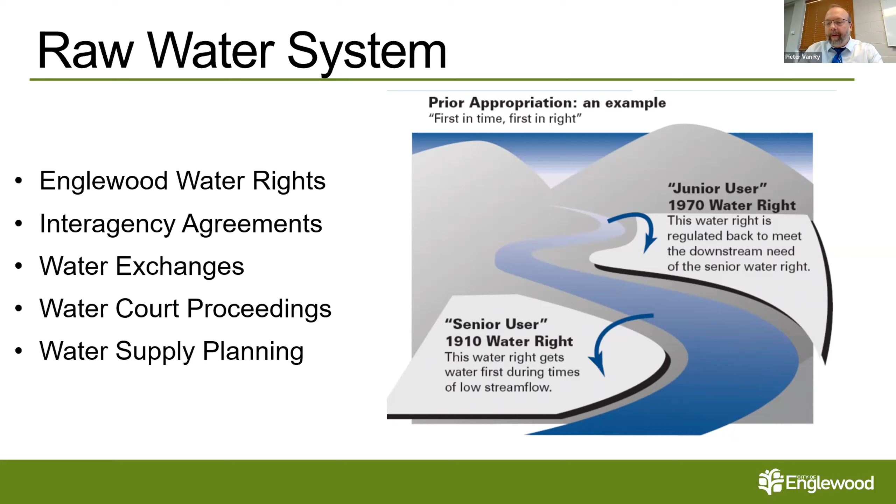The point of the two contracts is we get a lot of support from outside legal counsel and outside engineering support that's very specific to water rights. It's a very specific, unique skill set that it's unreasonable for us to have in-house. So the city for many, many years has worked with outside legal counsel and outside engineering. You can see some of the things they help us with, mainly water rights portfolio related things. They protect our water rights portfolio with the growth in Colorado. The pressure on water systems is growing every year, and with that pressure is further exposure and vulnerability to our water rights if we're not paying attention.

A lot of what they do is track every water court case that's going on and make sure that Englewood is not injured by those cases. They also optimize the portfolio, and we do a lot of work around supply and demand planning. So this is the raw water supply work.

The two companies we work with are Berg Hill Greenleaf and Martin and Wood. We've worked with them for many years. They have a significant amount of institutional experience and knowledge of the city's water rights portfolio.

They have history that goes back to the 90s as it relates to how our water rights have been managed and supported over the last several years, which is important as new cases are brought to water court. That historical knowledge of why agreements or stipulations were made in particular court cases is important, so they retain all that information and continue to support us as new challenges or water rights are sought by other parties.

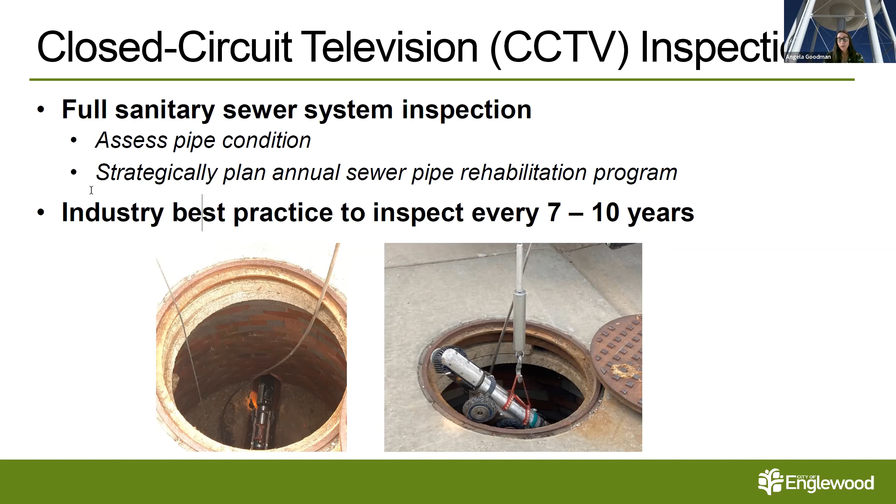There are some pictures of a typical camera getting lowered into a manhole, and then the camera actually inside the manhole, and it drives along the bottom of the sanitary sewer. The sewer does not have to be completely devoid of water in order to get a view of what's going on. 5 contractors responded to our RFP, request for proposal.

We actually selected ProPipe Inc. They had the best approach to complete the work, and they had the lowest bid. The table below shows all 5 contractors that submitted what their fee was, and includes a $50,000 traffic control cost for each of them.

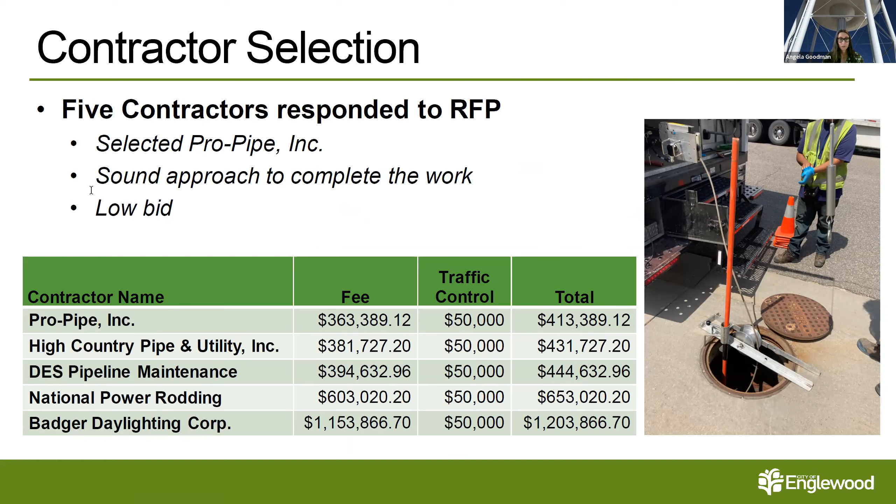Are there any questions? It doesn't appear so. Oh, here we have Jim. Go ahead. I do have one. Do you know, as far as number of blocks or miles or whatever, how much they're going to cover each year? That is a great question.

Let me pull up the other piece of information that I have. So we are doing approximately 80 miles of sanitary sewer. That is the statistic that I have. I don't have how many blocks that is. It's essentially the entire system. That's the entire system, correct?

Well, I thought you did it every 7 to 10 years. So aren't you doing a 1/7 or a 10th of it? The total is 80 miles? The total is 80 miles, and the intent is to do the entire system in 1 year, and then you repeat that every 7 to 10 years so that you get an accurate picture of how the sanitary sewer system is changing over the years.

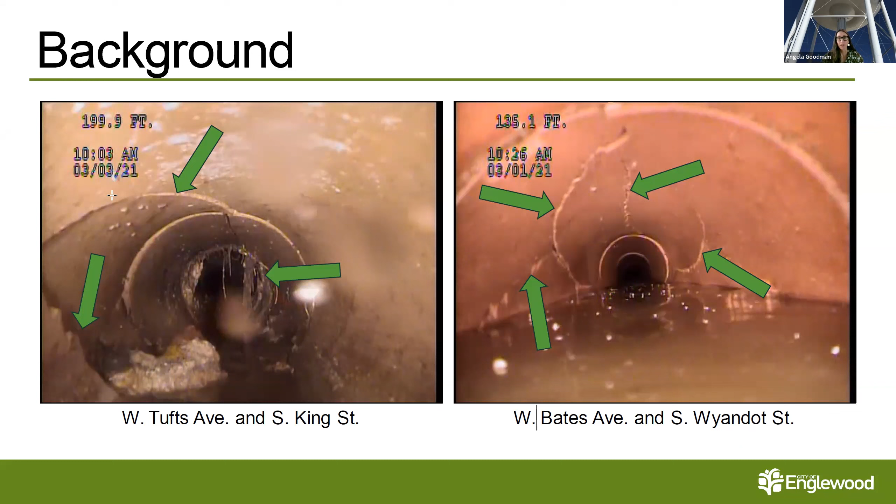So the cured in place pipe is actually a mostly trenchless technology. The liner is actually inserted into a manhole, and then it kind of turns itself inside out through the length of a manhole to a manhole. It is a completely structural pipe, so that if the host pipe, as you can see in this slide, were to go away, you would still have a full pipe that is structurally sound.

After they do the CIPP liner insertion, there's another little tool that goes in and cuts out any service laterals that connect up to the sanitary sewer, and that is the extent of it.

All right, we have a few. I'm sorry, Mayor Sierra, is your hand still up, or do you have a fresh question? No fresh question, I'll lower it. Okay, Marjan and then Ty.

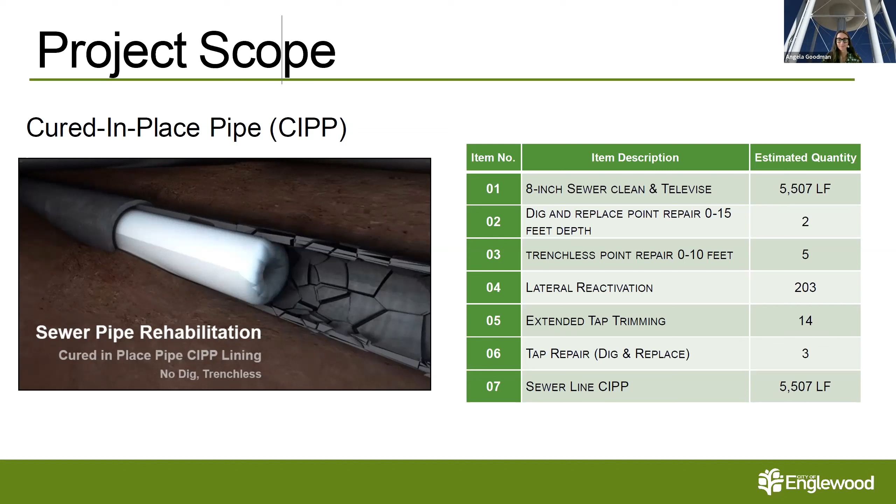Any further questions? All right, I think we're good. Marjan, do you have a new question or is your hand just left up? Yes, just a very fast question.

Have you guys worked with this company before? I have not worked with Granite Inliner. Insituform is kind of the old standard. When I was doing this 20 years ago, Insituform was kind of on the leading edge, and then I believe their patents ran out, so more people are able to do this. We did check into their qualifications, and in addition to low bid, they were a qualified contractor. Thank you so much.

Can I get a motion to recommend that City Council approve by motion a contract for construction with Granite Inliner LLC for sanitary sewer pipeline rehabilitation services in the amount of $415,555.55, with an additional $40,000 of staff managed contingency for a total project authorization of $455,555.55? So moved. Thank you.

Second. Is there a second? I don't know, did we have two seconds there? That makes a fourth, but no. I seconded. All right, thank you, Chuck.

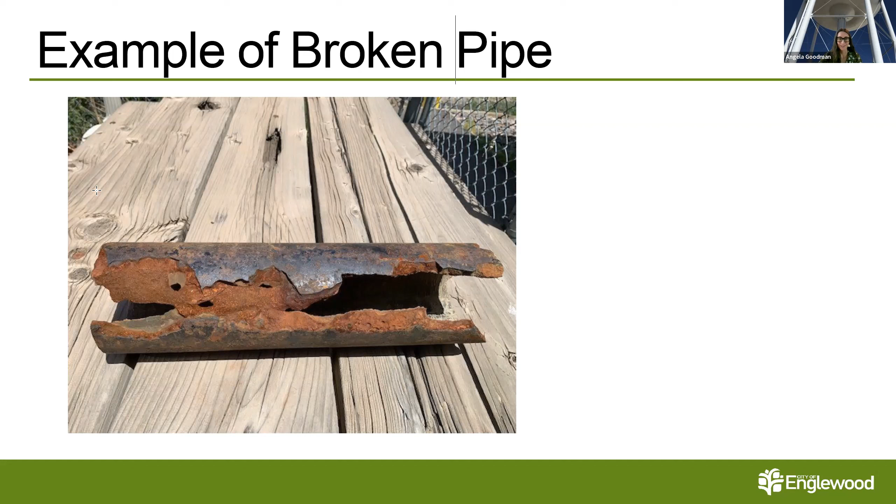As you can see from this example of a pipe that was broken, we actually took that out of a repair a couple months ago. Some of the pipe in our system is in bad shape, and when these breaks happen, sometimes the break itself is a little bit more catastrophic than others. This was actually a pretty substantial repair. I think the majority of the repairs are a little bit less dramatic than this — it's more of a pinhole leak — but I just wanted to share that with you.

And are there any questions? Not seeing any hands. I'll ask one, Angela: the inspection that we just discussed on the sewer side — do we do something similar on the water line side at some point?

We generally don't. I believe they're still working on the technology to line water lines. It's a bit different because it needs to be NSF approved since it's drinking water, so it's a different process. Wastewater is much simpler because there's a lot that happens between what goes into pipes to convey wastewater and what goes back into rivers or other systems to be treated. So most of the repairs we'd do on water lines wouldn't use the same method. We know our system is aging, and we mapped the water line breaks we've had historically, and there aren't pockets — they're kind of all over. You could almost pick any area in the city, cover your eyes and throw a dart at it, and it would make a big impact on the water system itself.

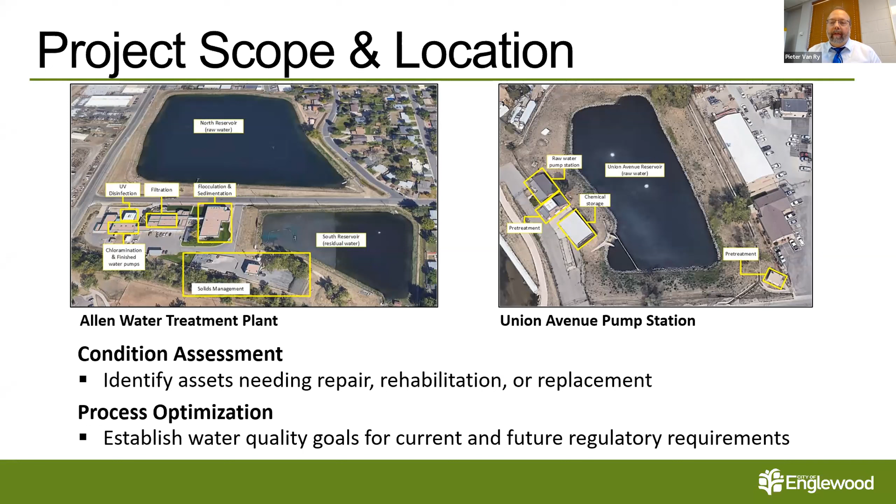So it's things needing rehabilitation and ways to improve the system performance to address that larger issue of taste, odor, and hardness, to see if there's ways that we can optimize in-plant as part of the treatment process to further improve those aspects of the water that we treat.

You can see the project deliverable is essentially a roadmap for future capital improvements specific to the Allen treatment plant. We have a number of projects already underway in parallel that we know are necessary for improvement. This will provide a more comprehensive inventory of the projects that are necessary.

The selection process: several consultants proposed on this project, and the selection committee evaluated the consultants and interviewed the top 4, ultimately landing on Brown and Caldwell, whose initial proposal was the lowest and also had the most relevant experience and the strongest approach to the project.

Here's the timeline of how that occurred. The RFP was posted, went to notice, and we're looking to do a notice to proceed sometime in the next month or so. Then, with the project duration, by the first quarter of 2023 we'll have a final 10-year CIP specific to the Allen treatment plant.

So with that, I will open it up to any questions.

I'm not seeing any questions at this point, so I will ask for a motion to recommend that City Council approve, by motion, a professional services agreement with Brown and Caldwell for condition assessment and process optimization services in the amount of $281,850, with an additional 10% staff managed contingency of $28,185, for a total project authorization of $310,035.

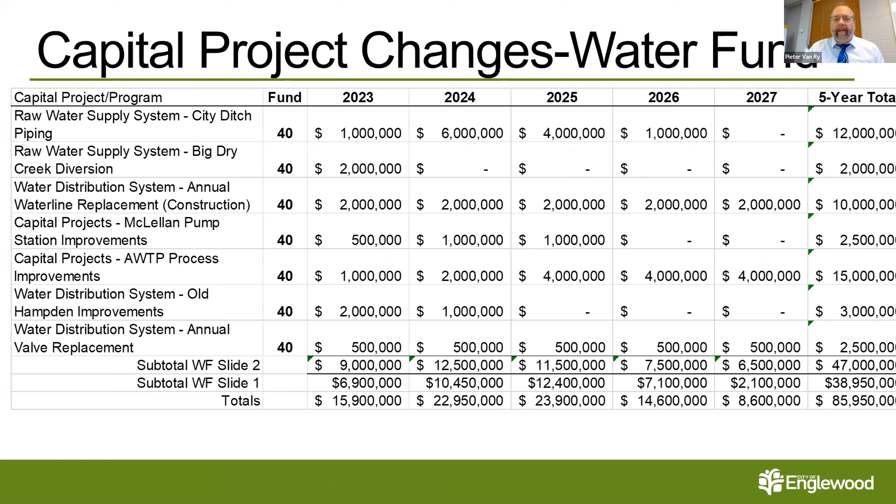The capital project we talked about a few months ago—nothing has really changed. The thing to keep in mind is that between 2023 and 2027, it's got a capital program execution of $86 million. A lot of that is WIFIA funded projects, and you can see the ramping up of those capital projects in the next few years.

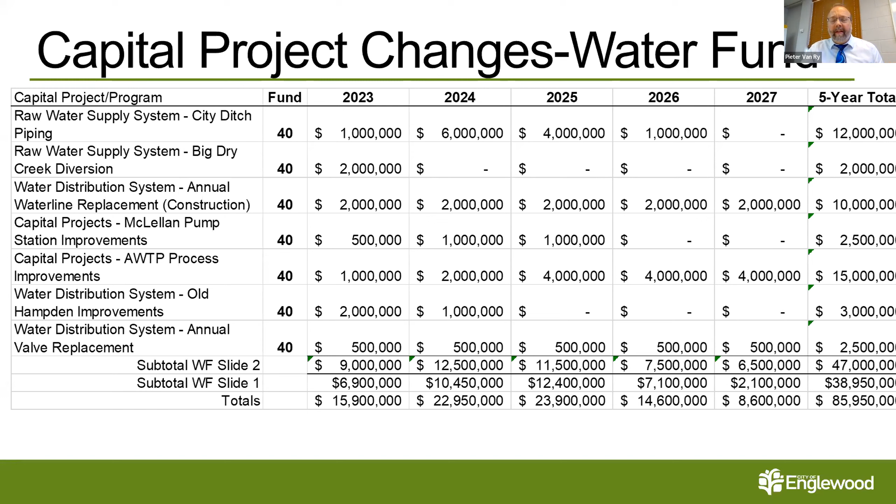I would anticipate that will slide out over the next few years because part of the challenge with executing capital projects is staffing and balancing that. What I don't want is to under-budget if we're in a position where we can actually execute a project. So it's aggressive, but just plan that it'll likely slide out over time. This is in our models, and it's sustainable based on our financial models.

We have a number of proposed FTEs to continue building out in-house resources for the water and sewer fund. There's a senior construction inspector geared largely towards executing that significant capital improvement program, and a couple of utility system techs for the distribution system. We've restructured that area to put complete crews together so we're not chasing issues, but strategically addressing things in a more programmatic approach. By adding these last two utility techs, we have 2 complete crews, plus support staff to help bring connectivity to engineering and other asset management aspects.

And ultimately 1 more plant operator. When we get fully staffed on plant operators with this last one, we have room to breathe—we're not scrambling and paying overtime to staff the plant with 2 people 24 hours a day if we lose a staff member or someone goes on vacation or medical leave. We've been building toward that, and 1 more FTE will allow us to get there.

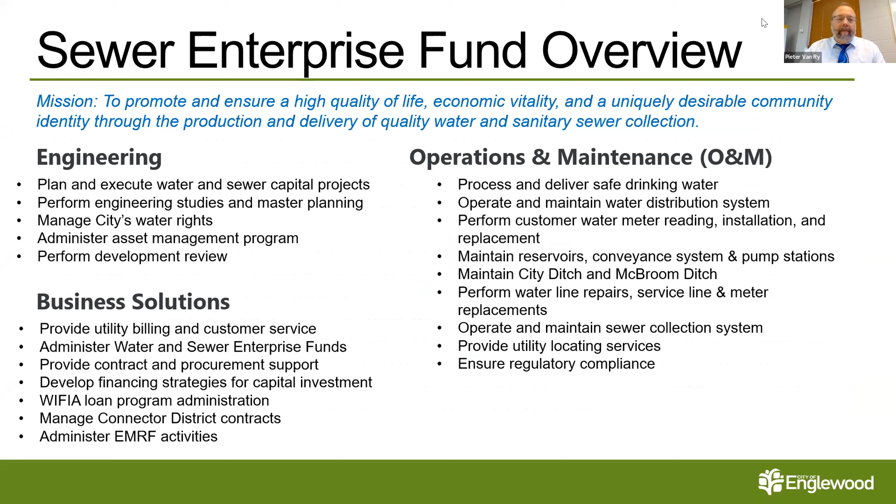So the sewer fund, a little bit quicker. You see it's the same overview, generally the same types of work. It's just instead of water related, it's sewer related. Same structure from utilities as a whole.

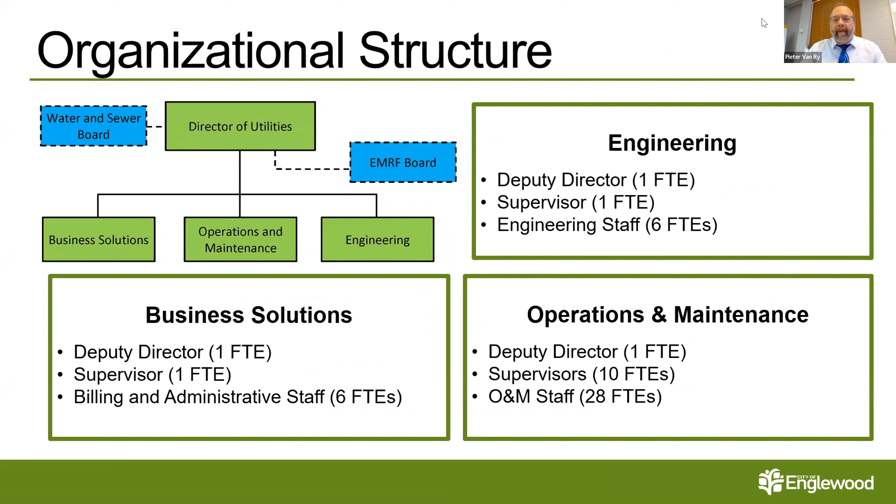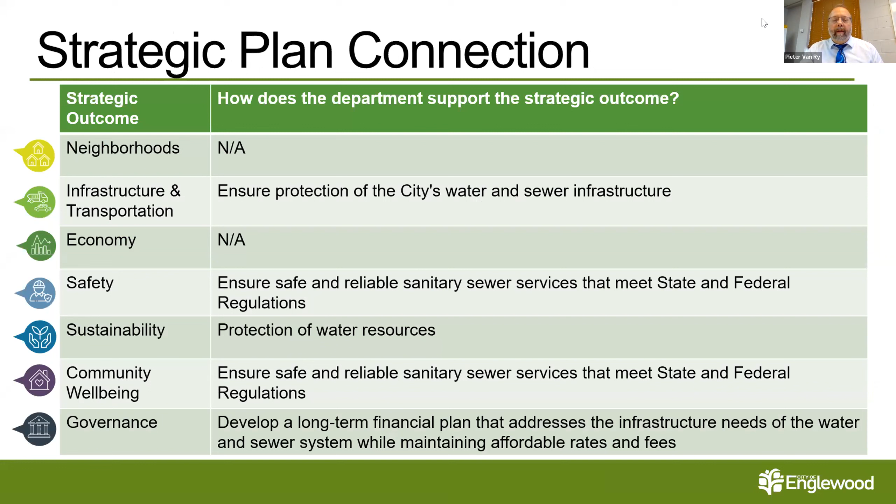A number of these staff are split between water and sewer so we charge them differently to the enterprise funds. You can see this is more about protection of water resources, protection of our clean water resources out in the environment.

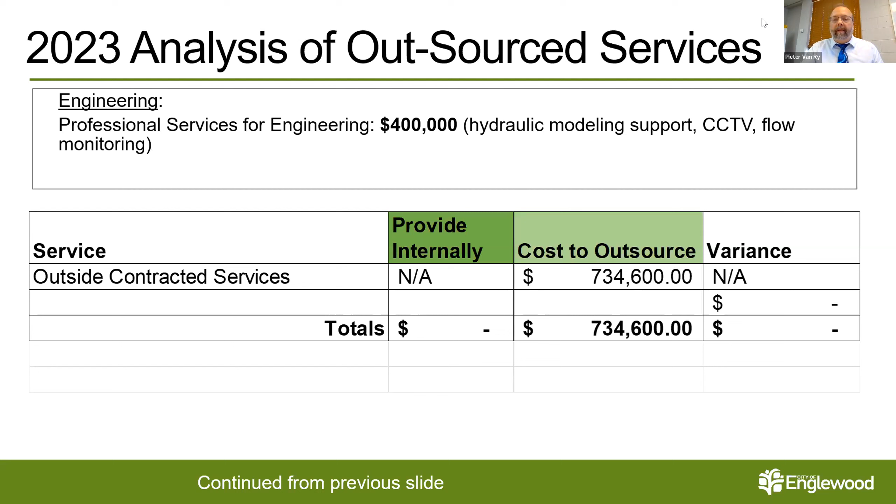You see the professional engineering, which is essentially the hydraulic modeling work, the CCTV that we talked about, and some flow monitoring, totals $734,000. That's the outside contracted amount.

The capital, with the exception of ongoing investment in sewer pipe and manholes, we have two major things. One is the Hampden Improvements Project, and then the major thing is the 50% contribution that the city of Englewood provides for SPR, and that's just under $7.3 million.

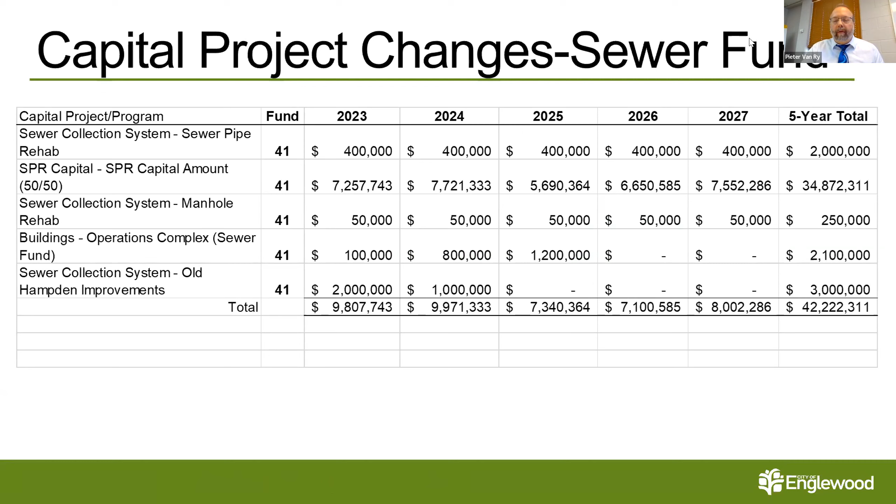There has been expressed interest from some of the districts, the most significant of which is Southgate. That district manager has expressed to us a desire to move away from annual billing, which is what we do today, to move to monthly billing. So that will move from those connector districts getting billed once a year to getting billed 12 times a year.

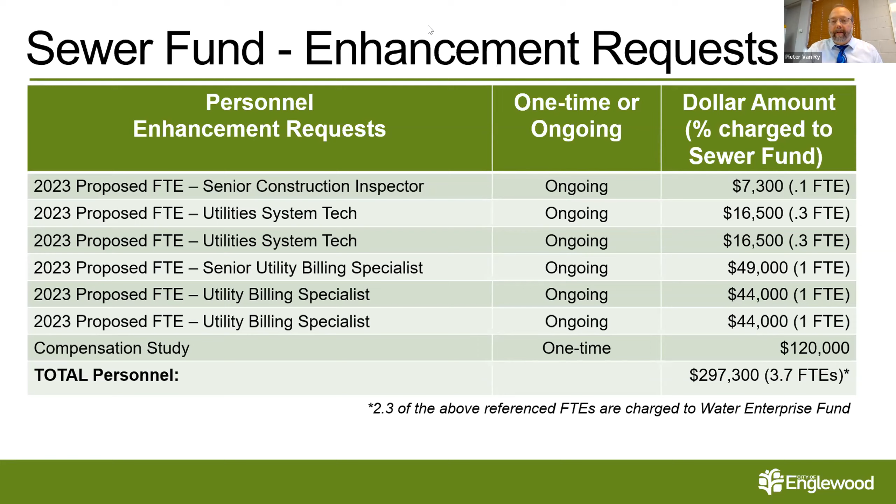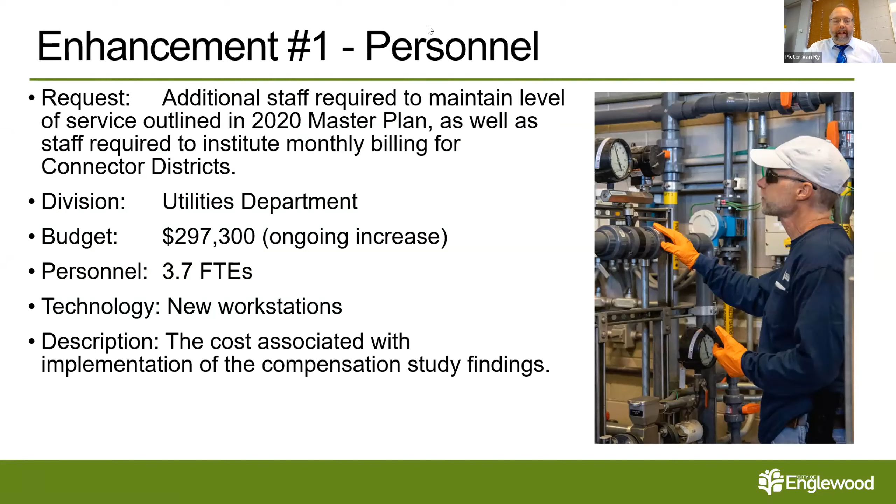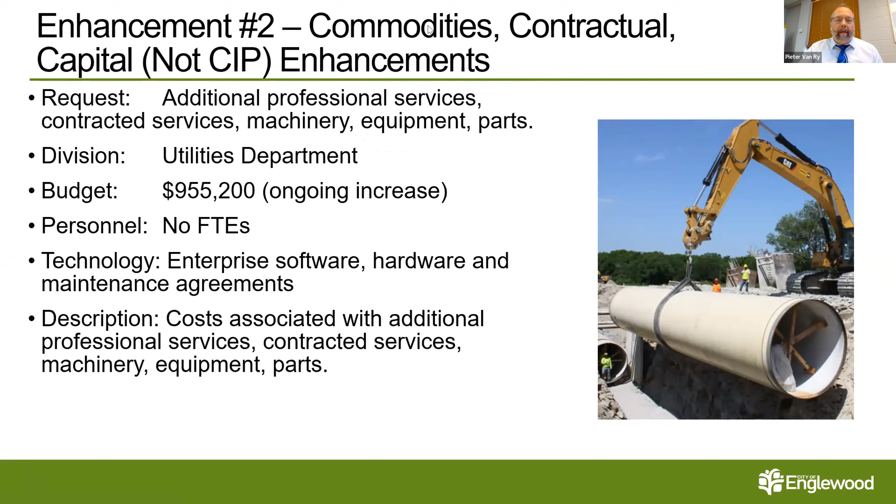There has been interest expressed by the connector districts. You can see the compensation study, that's the sewer proportion of the compensation study contribution. Personnel enhancements and contractual totals about $1 million. You can see what those are, the FTEs that we talked about, and then the non-CIP things that we're investing in to ensure that we ramp up the ongoing maintenance of the systems.

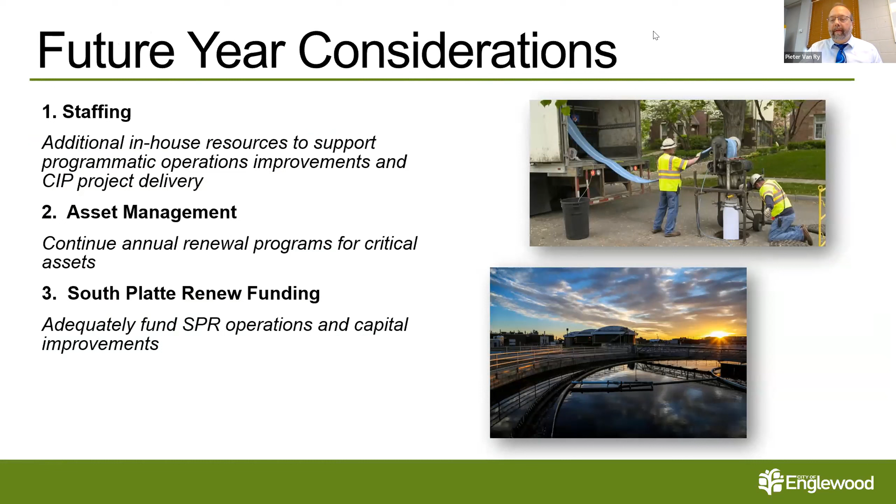Similar interdepartmental support, and then future considerations is staffing, asset management and renewal, and then the ongoing South Platte Renew funding, which is the most significant line item of the sewer fund as a whole. So that is the sewer fund.

I am going to turn this over to Director D'Andrea to talk about the stormwater fund.

Thanks, Peter. Good evening, everybody. So my slides look very similar to the water and sanitary sewer. So we'll walk through those and be able to answer any questions.

So again, the Stormwater Division is a part of the Public Works Department, as opposed to the water and sanitary sewer, which are part of the Utilities Department. Our overall mission is to ensure a high quality of life, economic vitality, and a uniquely desirable community through delivery of quality projects, programs, and services. And that really speaks to stormwater in that this is a critical function.

And as you'll see, similar again to water and sanitary sewer, our focus is on deferred maintenance, taking care of that. Really, it's been a number of years and we've really gotten back in step, as well as capital investment and then the funding to support that.

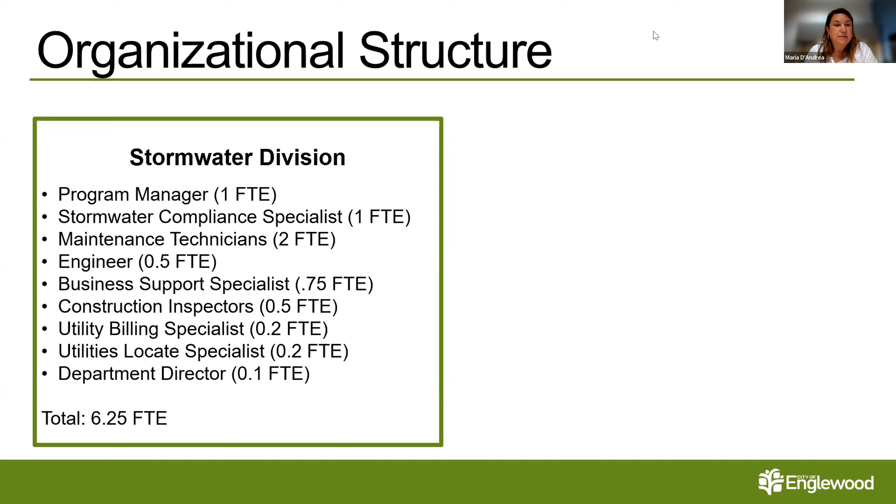So overall, we have 6.25 FTEs identified within the Stormwater Division, including 1 program manager. Many of these positions are currently not filled. So we lost our program manager in April, and it's just been a really hard environment to try and hire for any of these positions.

So as I mentioned, we're focused on 4 main areas within stormwater: system maintenance and repair, planning and prioritization, which is basically planning for the improvements and program work that we need to do. We did complete the first ever stormwater master plan in 2019, and we also completed a rate study in 2019. So that speaks to the program funding. And since that time, we have been carrying out basically that direction within the master plan and the rate study.

Our professional services are focused on the engineering side of things, so designing our projects, and then system repairs. So we continue to have, similar to what Angela talked about with one of her earlier contracts, we go out for those services to identify needed repairs within the system. We have been doing a lot of that televising work in-house, but we may also need to go out and do that through a contract as well.

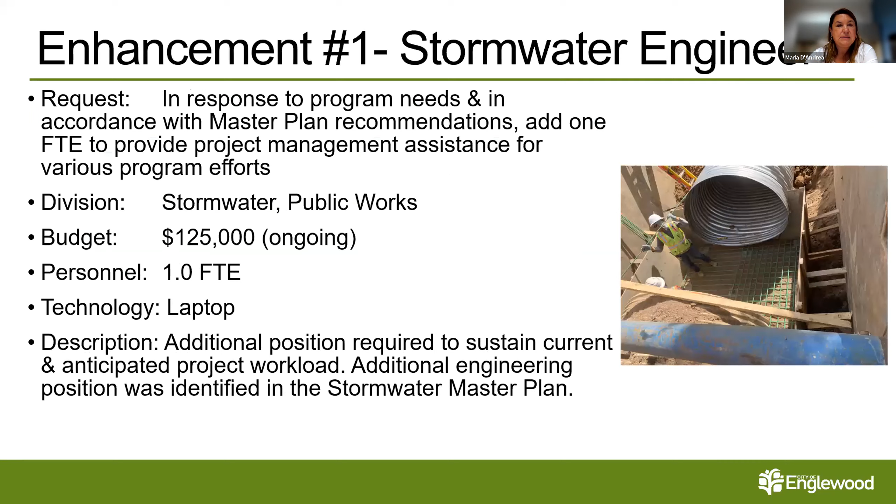Future year considerations. Our initial take was to do what we called in the Stormwater Master Plan S1 and S2, all of S3, S4, and the hospital project or Old Hampton. So in future years, we're looking at what do we do next, and do we have a prioritized list of projects within the master plan. It's talking about the timing and the funding for those, especially given that we've recently gotten some pretty good rates for some loans that we've taken out, and we're also pursuing some different grants. So that will help us get the next round of capital projects lined up.

So with that, I think we're done, and we'll open it up to questions.

All right. Do we have any questions? All right, Marjan? I was wondering, the $3,100,000 that was dedicated to the Old Hampton project, is that something that is compensated by the hospital, or is that just laid on the shoulders of the residents of Englewood?